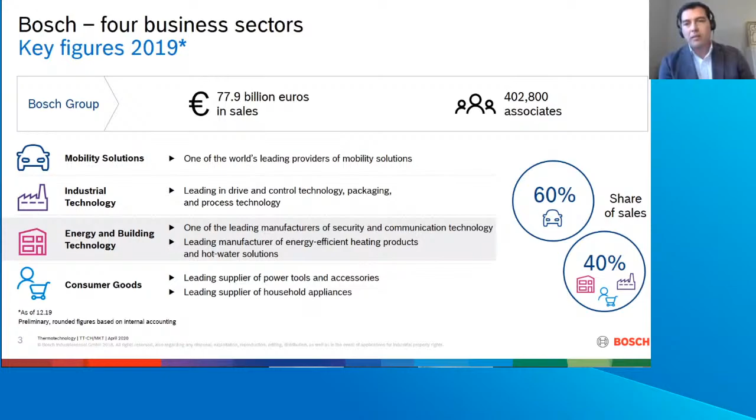El porcentaje de volumen de venta es un 60-40: 60% automotriz y el 40% del resto de las divisiones. En esta slide se muestra cómo está dividido finalmente nuestros.

Un aterrizaje a termotecnología. Nosotros somos un equipo de 14.500 personas que trabajamos en promover y desarrollar ciertos productos para agua caliente, para calefacción, para el sector residencial y para aire acondicionado en los sectores comerciales e industriales también.

Hoy día principalmente nos vamos a enfocar en lo que tenga que ver con Commercial and Industrial Heating, que aquí podemos ver destacada en color gris en la segunda parte, donde mostramos nuestra facturación aproximada de cuánto representa esta unidad de negocio para termotecnología.

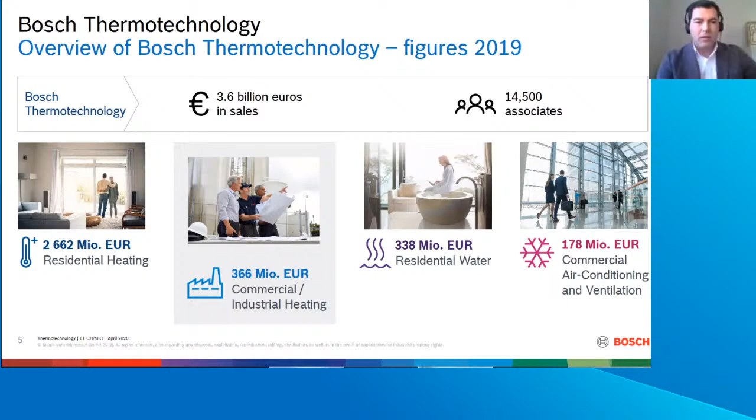Importante destacar que todos nuestros productos hoy día de la línea comercial e industrial principalmente se fabrican en Europa. Está destacado por cada producto, dónde está ubicada cada producción. Sin embargo, hoy día la concentración de los productos que vamos a compartir hoy en el segmento industrial son de 2 plantas: Gunzenhausen y Bischofshofen, de donde vienen todas nuestras calderas industriales hacia el mercado chileno y también hacia todo el mercado de Latinoamérica.

Quise mostrar nuestros sistemas y soluciones. Hoy día nos vamos a concentrar en Process Heat, en Heating, y también para que ustedes tengan una información acerca de lo que manejamos en el sector comercial e industrial.

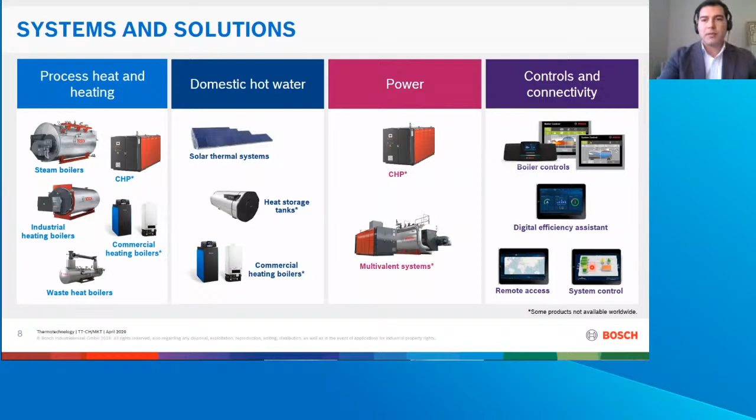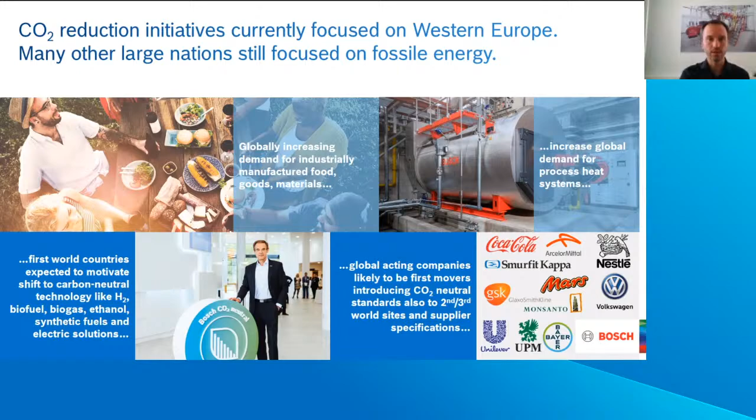Therefore, what we are also seeing, we're getting a lot of requests from our so-called key account customers, be it Mars, Unilever, Nestle, and others, who say we also want to be CO2 neutral. And even one step further, we also want our suppliers to be CO2 neutral. And this is because our customers demand it. If they have the choice and they can buy something with a good consciousness because it hasn't polluted nature, some customers are willing to spend a little bit more money on that. And therefore, I think this will be a very crucial topic to not just big companies, but also their suppliers.

What are we witnessing? At the moment, global population is still increasing, and over the next decades, it is estimated to still further grow. And also, the wealth level is continuing to grow in many regions, meaning people want to consume goods. They want higher levels of mobility. They need more transportation of goods and also more production of goods to consume, be it produced foods, but also things in your daily life.

And whenever you produce something, you will produce at the moment with current technologies CO2, and thus have an effect on global warming. And what we will also see is in many regions that they will not just demand more energy, but also some regions, they will demand more coal, more oil, and more gas. Everybody thinks we are going completely to renewables. That is the case in Europe and some other countries, and also with some corporations in, let's say, their African locations, because they transfer their mindset to other countries.

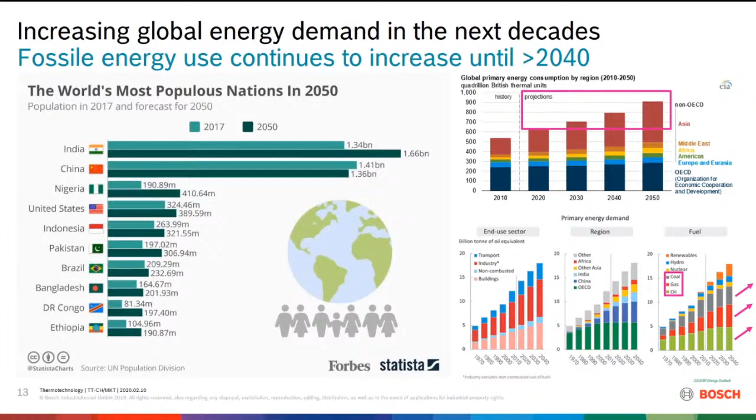But we see other regions like China, India, where CO2 emissions in the next decades will massively increase. They have some little highlight projects that they will communicate largely about. But if you look at these statistics, then we are not solving the problem globally at the moment. So therefore, our mantra is, you see here our CEO of Bosch, Mr. Denner, who says, words is not enough. We have to do something. Therefore, we are going this path.

Even now in the global virus crisis, of course, we are also affected, especially the automotive divisions of Bosch. But still, we are cutting costs a lot, but we are not cutting costs on the global environment topics. And if you look at it, we are producing ourselves. We also are operating lots of process heat systems and boilers.

Where does CO2 come from? It comes from burning gas, oil, fuels, so direct combustion, and also from indirect combustion. Because even in Germany, not all the electric power we get is from renewable sources. We still have a lot of coal and gas-fired electricity plants in Germany, but luckily we are on the path of changing this.

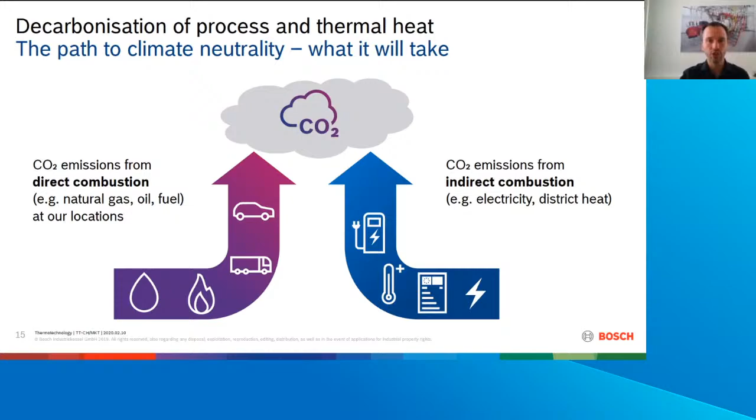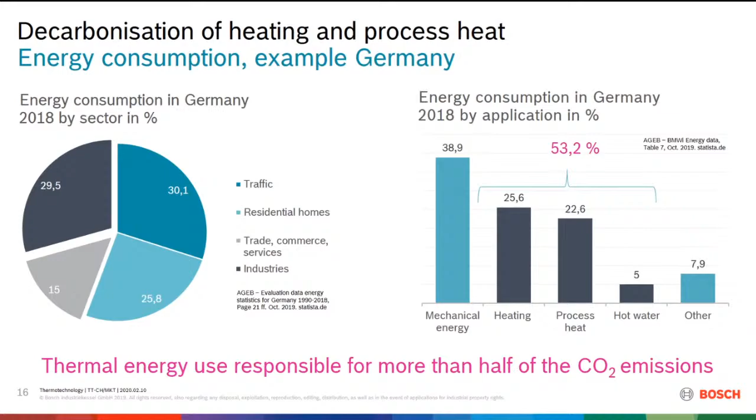Then, of course, before we go into the depths of the topic of hydrogen, why is this topic important for producing companies? This is because if you look, I have here the figures for Germany, but it is similar in many countries. More than 44% of consumption of energy is generated by the commercial and industrial segment, meaning nearly half of the CO2 emissions. That means we have a huge lever because it is just a few companies. If you look at the individual transportation, that's millions of people, billions even. And therefore, we have a large lever to act there and have a quicker progress.

And if you look at where this energy goes, then you will see that much of it goes to applications like heating, hot water, process heat. I imagine everybody of you has eaten something today that was produced with process heat already. Probably you're sitting on a chair with materials that needed process heat. You're going to work probably by car, your tires, everything needs some process heat during production. Therefore, more than 50% of the energy consumption of the companies goes into thermal applications, and those create lots of CO2.

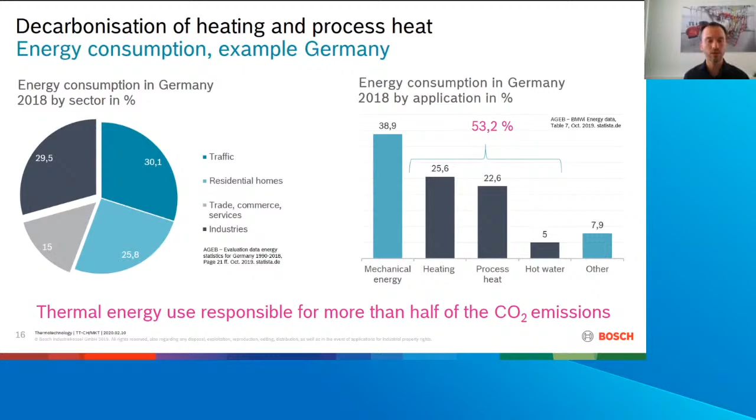Where does it come from, especially today? That's mainly fossil fuels, to be honest. And therefore, we have to differentiate a little bit technology-wise. If we look at the further slides, what are the technical options? Because that depends mainly on the temperatures we use. If we have low temperature applications, for our business, low temperature is up to 110 degrees. It's already quite warm, boiling water temperature. There mostly today natural gas or oil is used, but there are already technologies available today, like heat pumps, power to heat, electric boilers that can be used to achieve these temperatures.

But when it comes to higher temperature processes, then it's a little bit more tricky. There we don't have so many technologies available. For example, we could use electrical systems, but electricity in most countries is several times more expensive than gas. Taking Germany here as a production facility, we pay about 16 cents for electricity per kilowatt hour compared to gas 3 cents, meaning it's more than 5 times more expensive. And if you then have a company with €1 million energy bill per year, then of course it's a huge difference if you pay 1 million or if you pay 5 million.

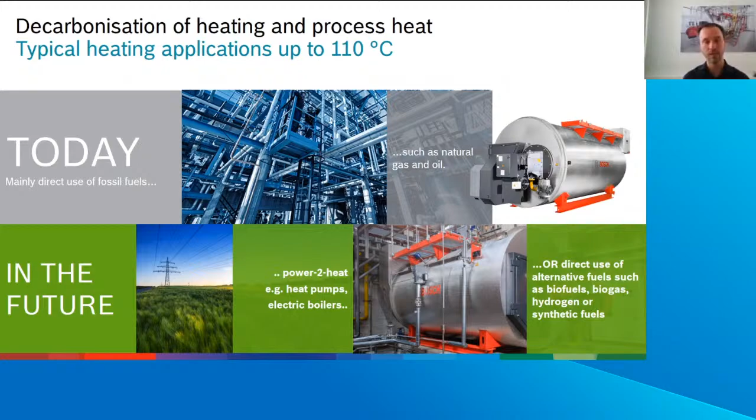As I said, the big challenge is then the high temperature process applications, meaning above 110 degrees, up to 300 degrees and more. And this is also the area, you see it in the background, the industrial boilers. For example, they play a huge role where we go into the pressure directive.

So meaning it's also safety relevant equipment because you have high pressure, high content of water. If I take our biggest boiler, if it's hot and under pressure, it has an energy content that's equivalent to 3.5 tons of Semtex explosives. And therefore, of course, safety is really crucial. That's why we also always have the authorities. And if we are then speaking about new types of fuels, for example, hydrogen, then of course safety has to be maintained at any time.

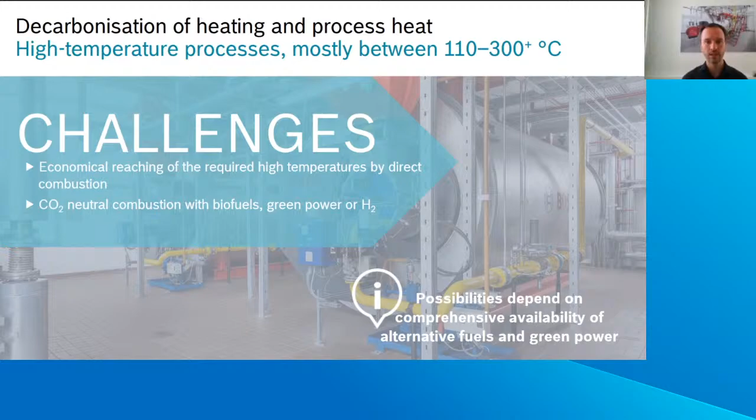So what have we done in the past years? We were thinking about, we have 130,000 boilers at the moment in the field that we have sold. These are all megawatt boilers. So that means we have a huge amount of CO2 creating products in the field all around the globe, also lots in Latin America. We have several dedicated experts working there on these topics.

Therefore, we came up with the idea, what can we do with the existing ones and the new ones as well? Let me put on my laser pointer here so I can show you a little bit more. So step one is CO2 optimization. We are also consulting large companies. We have other entities of Bosch who take care of more production equipment and electricity, but we are really focused on heating and process heat, and say, what can we do with the existing systems?

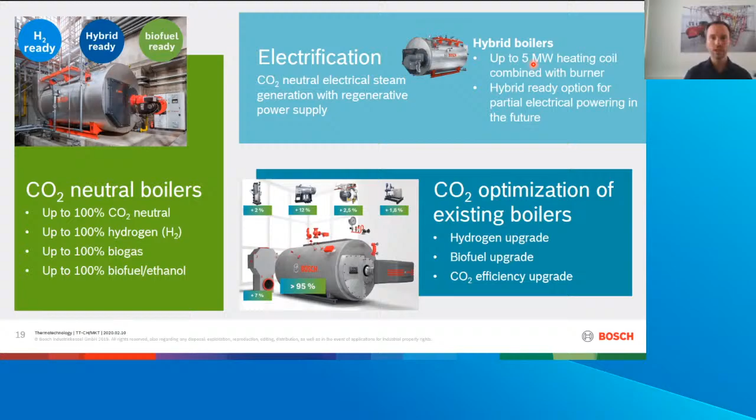And then we said, how can we introduce this? We have some customers who have some electricity available, but not all the time. So we developed hybrid boilers, meaning up to 5 megawatt, we will supply heat by electricity, and we have a burner, and the customer can balance and always use what he has available at the moment.

But now, the topic, of course, today, why you dialed in, is hydrogen. Therefore, I will also focus, and I will go a little bit more into detail here. And we have my colleague from engineering, Mr. Reich, in the line. So after the presentation, we will have lots of time to discuss. You can ask all your questions, and we will be happy to answer them.

So let's start with the basics. Hydrogen has begun to take a vital role in many long-term energy scenarios. To achieve maximum CO2 reduction, of course, it's important to use the so-called green hydrogen. Green hydrogen meaning produced by green power, for example, from solar parks, wind parks, etc.

I think it will be also important to deliver hydrogen from warm countries to colder countries, for example, Germany, and use this in the future because we have established systems, distribution networks that will have to be adapted. But basically, that's what we have been doing with natural gas over the past decades as well.

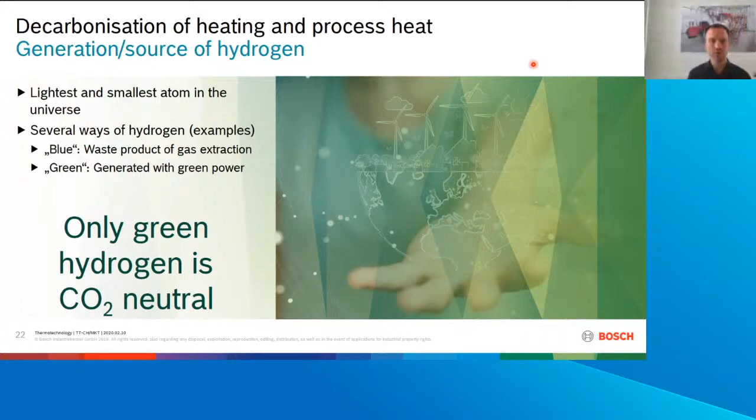As Bosch, we have realized the first hydrogen boiler project I know of, at least in the large power range, and not just research, but actual applications. And what I find the coolest fact about hydrogen is, instead of CO2 out of the chimney, there comes vapor from water, like clouds, and it's absolutely clean. That's really fantastic, if you do it right. We will come to this later.

So where does hydrogen come from? Basically, perhaps most of you know it, we get hydrogen from electrolysis, meaning we are taking electricity, putting water inside, we split it up, we get oxygen and hydrogen. Of course, you have to be careful not to mix them, otherwise it gets explosive. But this is a well-known technology for more than a century. Then, of course, the difficulty is how to deal with it and then burn it.

Another source, available today much more, is chemical processes. So by far, the most hydrogen we are having worldwide today is so-called blue hydrogen coming from processes. And then it's available, and either you use it or you don't. Sometimes it's just waste for some companies.

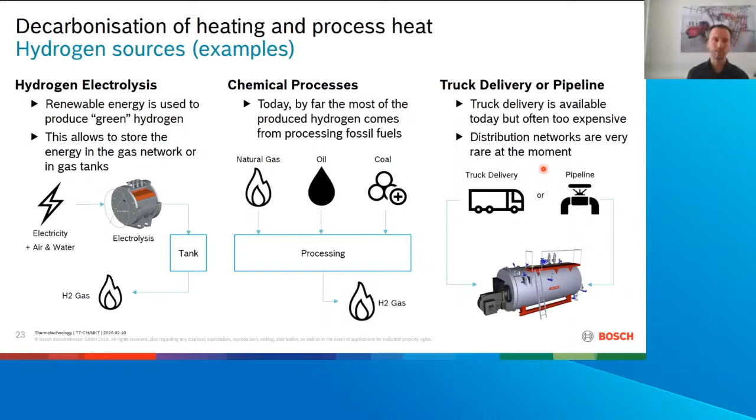And we have, of course, the topic of distribution. So in this case, delivery by truck, ship, pipeline is thinkable, but the distribution of hydrogen is different than from natural gas, because hydrogen, as I said before, is the smallest molecule we have in the world, and therefore it can go through many materials. And if it goes through and you have it in the air mixed with oxygen, then it becomes dangerous. Therefore, you need to adapt systems and special technology.

So burning hydrogen actually sounds quite simple at first. You put hydrogen in a burner, mix it with air, and ignite it. But the experience from our first few projects shows that it's quite tricky if you want to do it in a safe and eco-friendly way. Currently, gas grids that we have around the world are expected, they are still analyzing, to be able to use up to, let's say, 10 to 15% of hydrogen without any adaptations or only minor adaptations.

But we must be aware that the heating value of hydrogen is only 1/3 of that of natural gas, meaning if I put 15% hydrogen in a system compared to natural gas, I will have 95% of energy from natural gas and only 5% from hydrogen, because volume-wise, I have to put in 3 times as much. If I take it by weight, it's different. Then hydrogen has the highest power density. But here in gas grids, we are mainly looking at volumes.

And also, I need much more air. So that is meant here with gas volume. Because if I fire 100% hydrogen, I need 3 times as much combustion air. That means also we need to adapt systems, because normally we put in one part here, one part there. In this case, we have much more throughput.

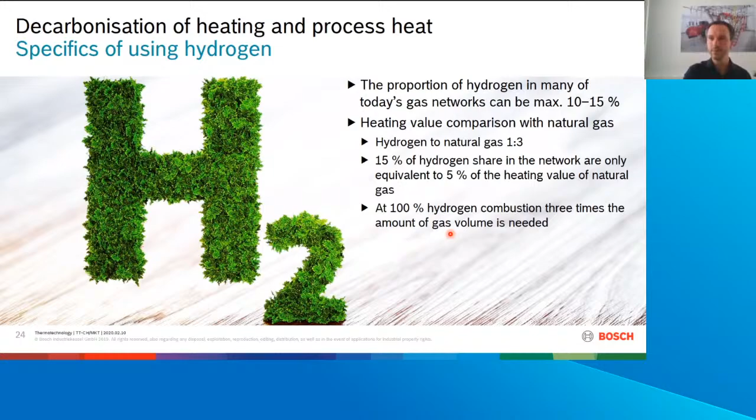Here we see it. Again, as I said, we don't get CO2 from the combustion, but we are getting H2O, pure water, if you want to say it like this. But it's also tricky to burn it. Why is it so? The flame temperature of hydrogen easily reaches more than 2000 degrees Celsius. That's much higher than for natural gas.

Also, it's very important to handle hydrogen carefully. I think most of you have perhaps seen it in school, cool experiments where you take a volume, fill it with some hydrogen, some oxygen, and then you ignite it, and there's a huge explosion. It's sometimes dealt with a little bit too extreme. For example, if you would take a glass, put in a few drips of the normal fuel you're using for your car, put in air, shake it and ignite it, it will also explode. So fuels burn quickly. If it's more quickly, we call it explosion. But lots of fuels do that. It's handleable. You can handle that.

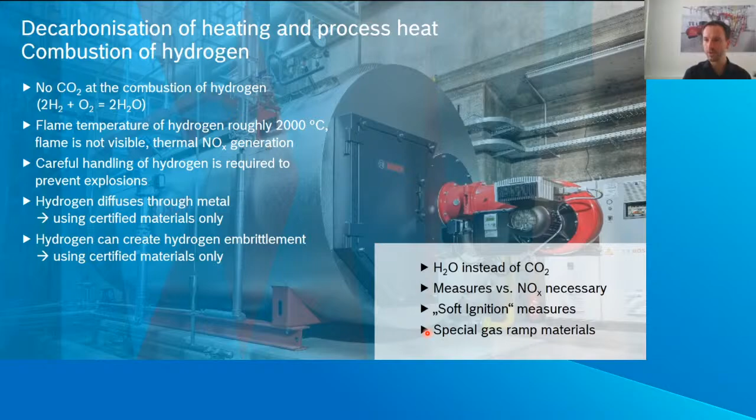Okay, what are we doing then to solve these issues? We have to introduce measures against nitrogen oxide, and we also need to introduce soft ignition measures. As I told you before, if it's a fuel that burns quickly, the quicker it is, the more likely we are used to call it an explosion. So soft ignition means we need to smoothen this process of the ignition in a safe way, and then everything's fine. As soon as the flame is burning, everything runs normal. Also, of course, we need special gas ramp materials, and also the same for the distribution.

What we are talking about with customers worldwide a lot is how and when they will have hydrogen available. So in case you are interested in using hydrogen in the future to reduce or eliminate your CO2 emissions for your process or heating system, we thought of different options we can offer, because not everybody has 100% hydrogen available now. And therefore, we came up with the option to make our product hydrogen ready. And I think other manufacturers of other products are thinking in a similar way. So you buy a boiler today, you're going to use it for the next 30, 40, 50 years. You want to be flexible.

Look at the Netherlands, they are prohibiting new systems that use natural gas. They had some troubles locally with their own gas sourcing. Nevertheless, you can come into a situation where something like that happens. Then you are in a position with a boiler system that cost you several 10,000s or 100,000s of dollars or euros. And then, of course, you want to keep using it. You need it to run your production. So therefore, we said, okay, we need to have modernization options for CO2-friendly fuels. We need to make and certify our products hydrogen ready, meaning you can transfer them to hydrogen later, or you can order them hydrogen firing immediately. But this is, of course, expensive. It's an investment in the future.

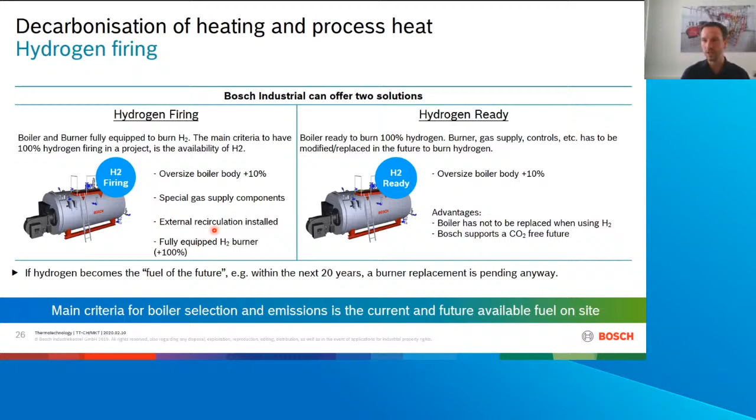The question I get a lot from customers is, can I mix hydrogen in my current system? We are in contact with all burner manufacturers, of course. They also produce some burners especially to our specification, for example here Dreizler with marathon - just one example, we are not exclusive there. We have the case that we can mix up to 2% of hydrogen with existing systems without major adaptations. Minor adaptations, and even up to 5% is possible with some minor changes, meaning we would retrofit the combustion control, mainly oxygen content based - measuring the oxygen content in the flue gas and adapting the fuel-air mixture - and that can compensate for a lot. Also saves you some fuel.

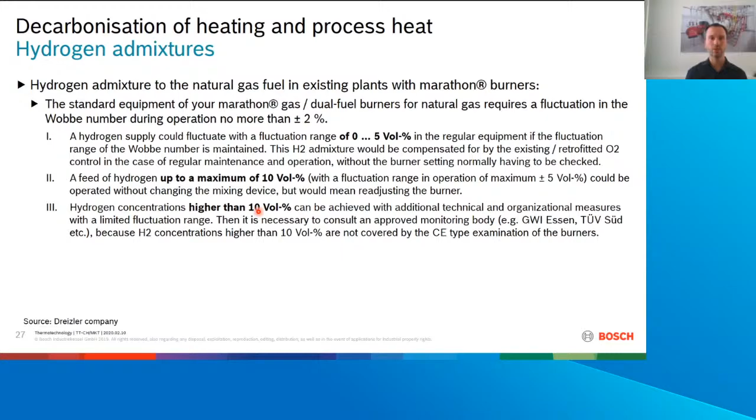What if we want to add up to 10%? Then we have to do a little bit more. We would have to readjust the burner, put a service technician there. He has to look at the extreme points of operation, meaning the maximum amount and minimum amount of hydrogen, and then we can adapt it. When it becomes tricky is if we take more than 10%. Then we need major adaptations because of the topics I told you before, and also we need a new certification, because, I told you, it's safety relevant equipment. And also the notified bodies will ask us to do so.

I got for you some exclusive pictures, we have not published them anywhere else yet, of an example of a hydrogen burner. This is a multi-fuel burner, of course, a nice Bosch boiler, and it uses oil as well as also natural gas, here in yellow, and also hydrogen as fuel. And here we are mixing it. In this case, the customer needs to be flexible - he has discontinuous amounts of hydrogen, meaning he has to adapt the amount.

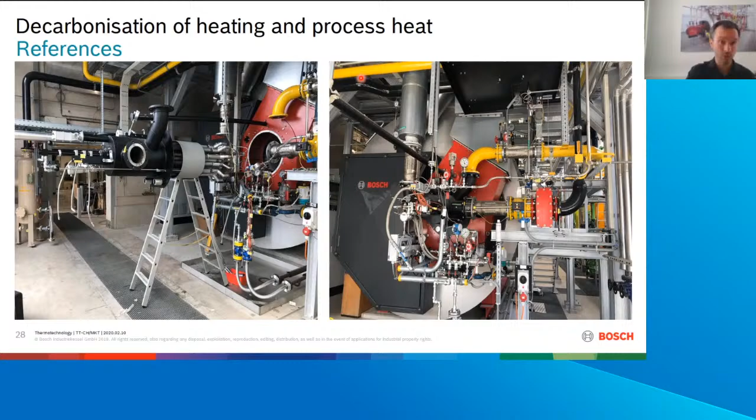He has the external recirculation here because he needs very low NOx emissions, nitrogen oxide, and therefore he has to put some exhaust gas in the burner to cool the flame and make the nitrogen less reactive with the oxygen. And if you look here, we pull the burner out of the boiler to give you a very detailed view inside. And here you can see it's a very complicated technology, and we also have to have several different burner heads at the same time working independently. And then we need the control technology to align them again so we achieve the values we want.

Here's another picture, a little bit more in detail. This is one burner manufacturer that we work with on hydrogen. We are working with 3 manufacturers mainly, meaning Dreizler, Elco, and Saacke, depending on the application. And then we engineer together with them the system and attune it so that the set specification parameters in total are working.

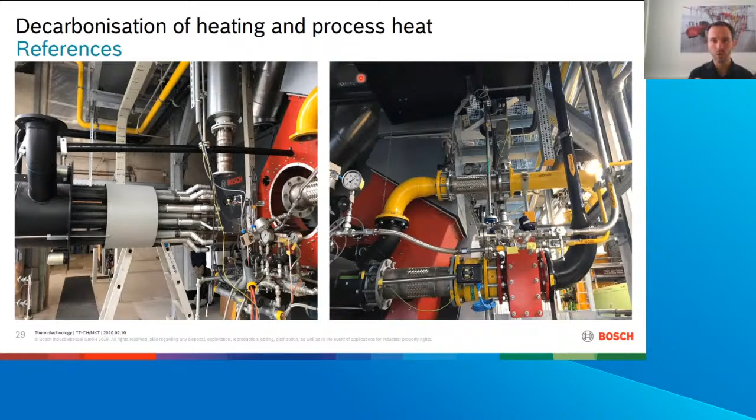I also have some breaking news for you. Just yesterday I got confirmation on a nice project we have in Germany in the community of Wunsiedel, not very well known, in Bavaria. It's very sunny here, as you probably can see out of my window. And there they installed a power-to-heat, power-to-gas installation together with the company Siemens that produces up to 10 megawatts of hydrogen. It's green hydrogen from solar electricity. And yesterday we got confirmation that we will be lucky and will deliver a 5 megawatt heating boiler that can accept up to 100% hydrogen. So they will have a green district heating for their community.

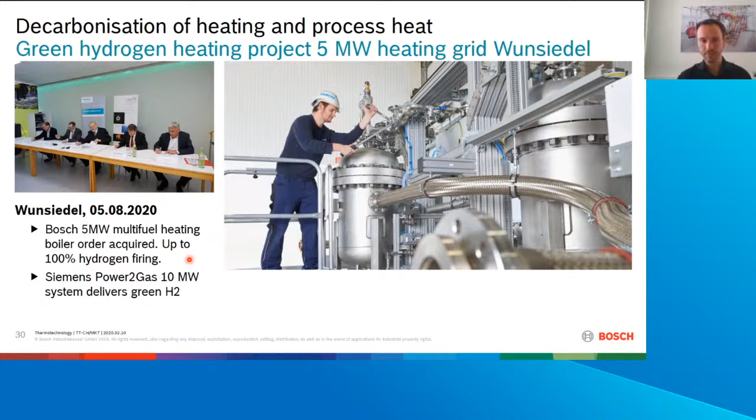Sorry, I had to drink a sip.

I would like, before we go into the discussion, to show you some information on biofuels and electric alternatives, because hydrogen availability will be a topic to be solved within the next decade or two decades, and we need some alternatives already now, or a mixture. I will keep it short, but I think it's an important topic.

So biofuels, what do we mean with this? I mainly mean liquid or gas type biofuels. Biomass, it always depends a lot on where you get your biomass from. If you take trees and cut them down, that's CO2 that's long-term bound, and you put it back into the air, meaning you have a negative CO2 effect.

If you have biomass, which is like waste that would be digested by bacteria very quickly, then this would put again CO2 or methane in the atmosphere. So in this case, it's CO2 neutral in the mid-range if you burn it or if you leave it to the bacteria to digest it. So it's a little bit more complicated.

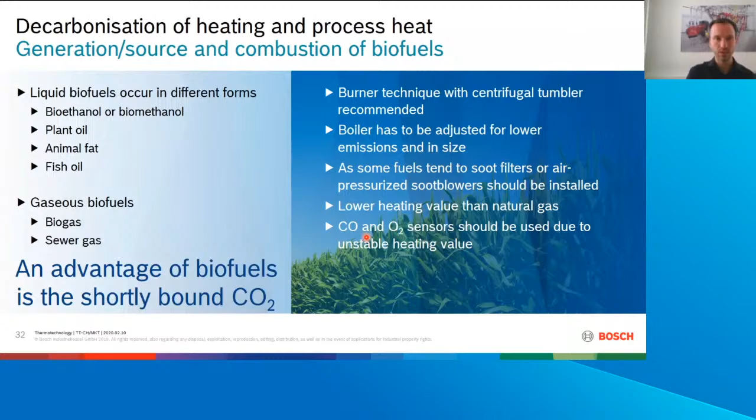I'm almost through, just showing you how such a system could look like, because we design every boiler depending on the application. I don't know of any boiler that has been produced twice here. In this case, it's in Denmark for the company Vattenfall, a huge energy company that produces electricity and district heat. And there they have a plant oil system.

The topic is that it's clogging up the system because of the combustion that's natural with this fuel. They have to clean it, up to 3 times per day, because they want to get the heat transfer surfaces clean again, since only if they are clean do they work efficiently. Otherwise, they use lots of fuel and have a high exhaust gas temperature. In this case, they use a rotary atomizer, a rotating cup burner.

And here you see all these lines in the front of the boiler. There they have pressurized air and fully automatic cleaning, because you can't open the boiler, clean it 3 times a day, let it get cold, heat it up again, and so on. That creates inefficiencies. And here the efficiency is not as good as with natural gas, but still 93% is huge.

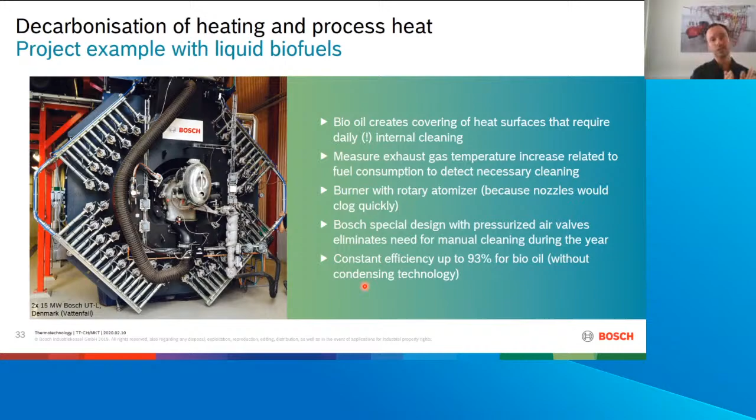If you compare it in the US, many boilers are running at like 84%, and they're proud of it, but it's always a question of how expensive your fuel is. So this is a very good value, considering also it's without condensing technology, meaning exhaust gas temperatures roughly at 130 to 150 degrees. With condensing technologies, we achieve lowest temperatures coming from 1700 degrees of combustion down to, let's say, 57 to 59 degrees Celsius exhaust gas temperatures. So we are really using all the energy.

Before I finish, let me show you a quick glance at electrical systems, because green power can also be used directly without transferring it to hydrogen, if I have it locally. Here we can implement electric coils inside the boiler, in this case up to 5 megawatts so far, probably later some bigger ones. And if it's green electricity, then of course this will be CO2 neutral.

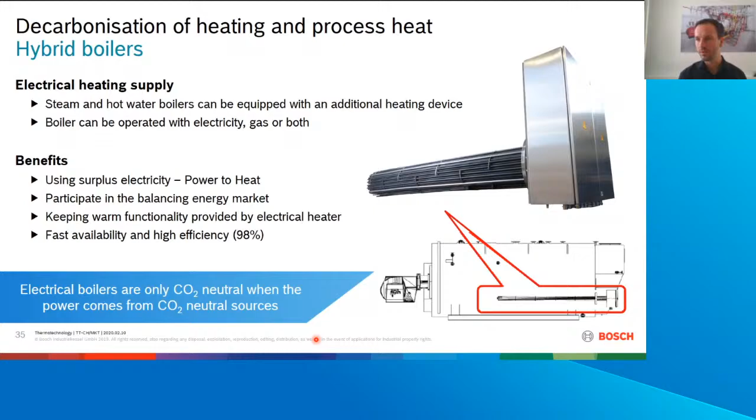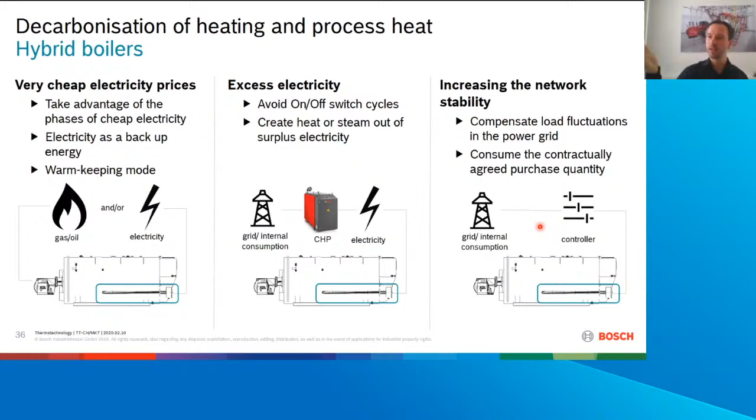When do people do this? One reason is they have very cheap electricity prices. They use it also for warm keeping, to not switch the burner on and off all the time. When they have excess electricity, because they have local electricity production and don't get a lot of money when they put it back in the grid. And also for network stability, sometimes they get benefits from their power company if they consume in a continuous way. Such a heating element can be an important factor to realize this, because the boiler is very flexible on which fuel it is using.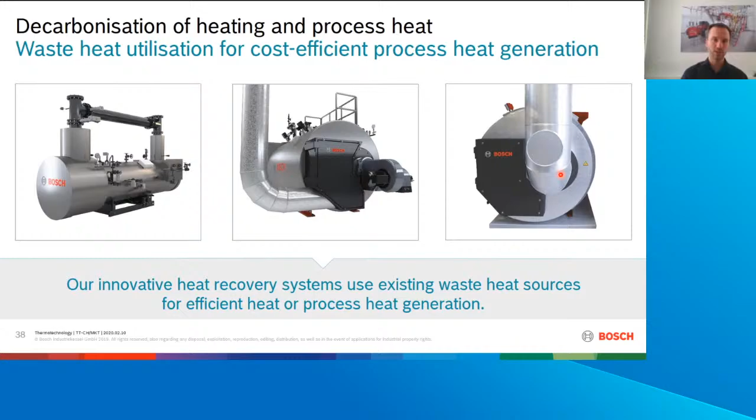Last but not least, if you are producing electricity locally, either a combustion engine or a turbine, you have exhaust gas from them. This is very hot, and you can still use this energy. It's possible to use, for example, a full waste heat recovery boiler for exhaust gas, or just use it partially, introducing it in the 4th pass of this 3-pass boiler plus the 4th pass, or also using it instead of a burner. This is kind of CO2 neutral because the exhaust gas was already generated, you don't create additional CO2, and you can save lots of energy with it.

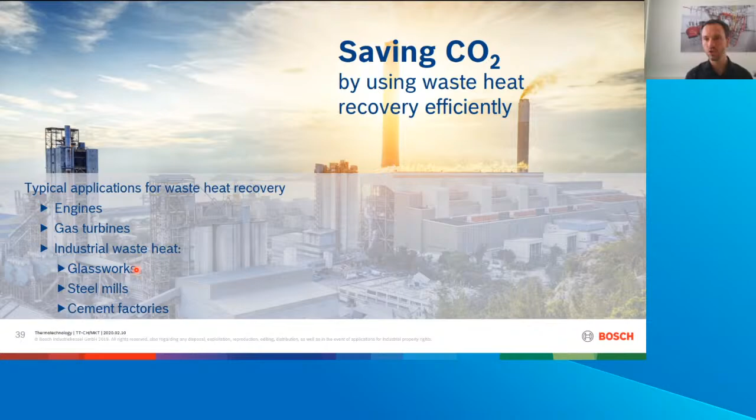Our typical applications are behind engines, behind gas turbines, also in glass work, so production of glass, steel mills, steel production, and cement factories.

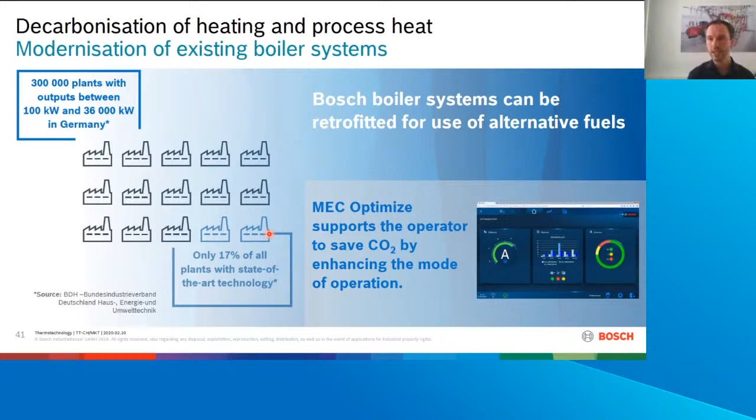Finally, but I will keep this very short, optimization of existing boilers. If you look even in a high-tech country as Germany, 83% of all boilers are inefficient because they are very old, average age between 20 and 30 years. There's lots of opportunities how to save energy there, be it on heat recovery, switching the fuel, also of course to hydrogen, by better controls, better optimization of the burner, saving electricity, water treatment, using condensate, and several other options. But that shouldn't be the topic here today.

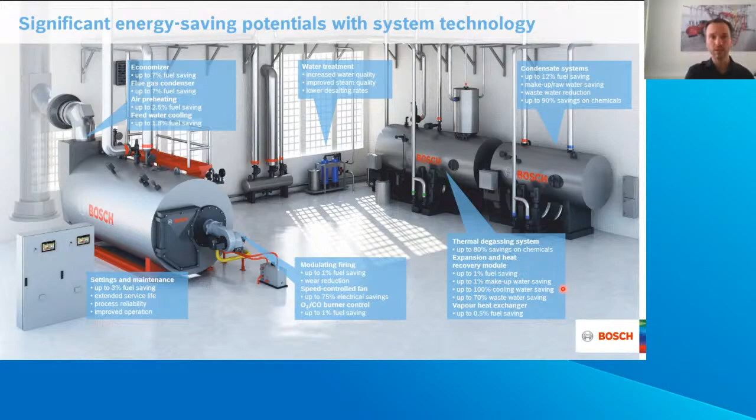The coolest thing about this is it's quite cheap, it's known technology, and the return on invest on these topics is usually between 1 and 2 years, so much quicker than a complete renewal of a huge system.

Last but not least, a curiosity. What I came across within the past years is that you burn a fuel, it comes out of the boiler as CO2, and then you reuse it in the processing. I won't tell any names, but for example, I know a very well-known beverage manufacturer that is available in all of your countries, where the carbon dioxide, the nice sparkle, comes from cleaned boiler exhaust gas. It is cleaned, it's completely pure. That's the nice thing compared to other options to produce it. They put it back in the bottle, so they don't need an additional CO2 source, because they said, we already have a CO2 source, you just need to make it consumable.

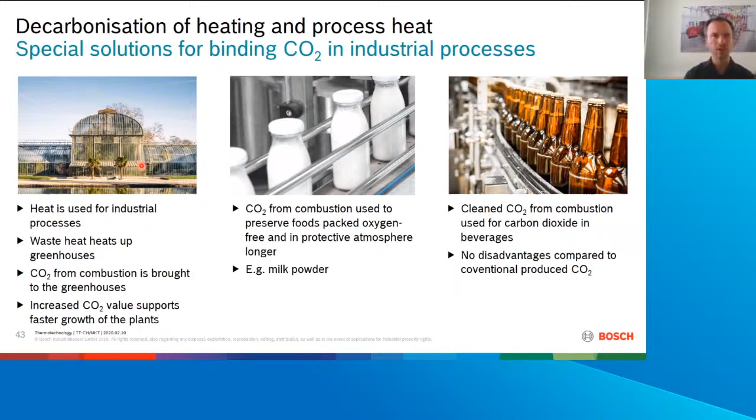Also, for example, instead of the gas, when you have milk powder, you have instead of air another gas inside, so it doesn't go into oxidation, then this is an option. And in colder countries, when you grow stuff in a greenhouse, they saw if they put additional CO2 in the air, the plants grow quicker with larger fruit, and therefore they introduced clean boiler gas into the greenhouses. They do this a lot in the Netherlands and also in Russia.

So summing it up, finally, before we go into the discussion, already now a 20 to 30% increase of efficiency in many existing systems is possible. So I always encourage customers to look at that, even if it's not our main business, but just for the sake of environment. You can also prepare the systems there for different alternative fuels like biofuels, etc.

Some fuel companies will have hydrogen available, and if they have, then of course it's an option to burn it and just get water instead of CO2. Or if you have it from green power, think about introducing electric systems, perhaps also as a combination. During the day, electric operation when the sun is shining, at night use the hydrogen. Then you have a much higher overall efficiency.

So I see hydrogen as a major fuel in the long term for process heat and heating, and also the topic of synthetic fuels generated from hydrogen in order to make it easier to transport, to use, safer to handle.

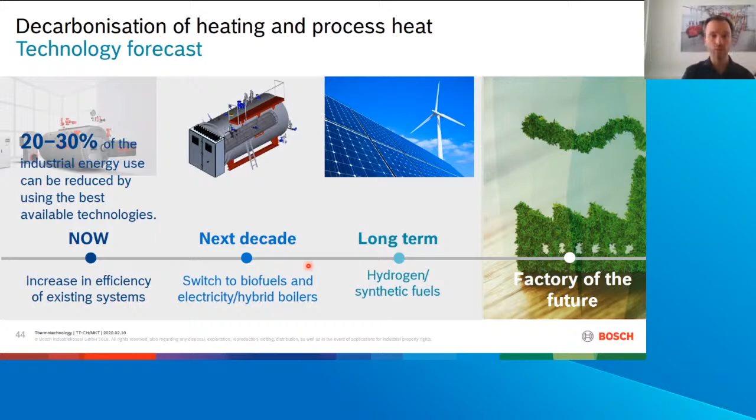In my opinion, my personal opinion, it will be an essential topic for the factory of the future, for the mobility of the future, and even in our personal lives, but this will be in the long term. The biggest effect for nature, CO2-wise, will be if we introduce technologies like these first for commercial and industrial applications, because the number of participants we have to reach in order to have a huge effect is much lower. Technology is available and also much more affordable. And in many countries, they also get subsidies for it because governments have their own CO2 targets and want to help companies realize it.

Therefore, my recommendation: check your existing systems. You will be surprised how much of your CO2 footprint actually comes from process heat and heating. Check for subsidies. Perhaps you get innovative technology for free or subsidized. Check which fuels will be available in the future and make your systems ready for the future already now. Prepare for it. And of course, subsequently, if you have something available, introduce it, because your kids will be thankful

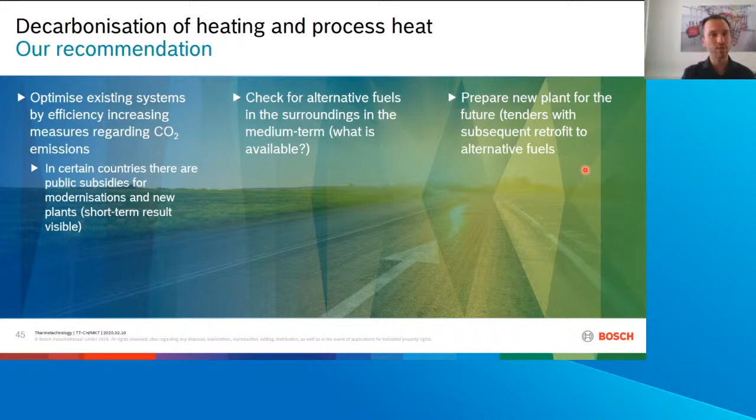for it. I have one on the way at the moment as well myself. And so I'm thinking about what his, to be exact, her future will be. And I want for her to have a clean and safe planet. Yeah, therefore, this is also a really personally important matter to me.

For Chile, we have also prepared a takeaway. And here, the recommendation is not just subsidies, but also look for pilot projects. Look if there are advantages for you, for your customers. Look, for example, for pilots in the mining sector or other examples with industrial boilers. Be part early, because if you are early in, you might be part of a huge industry of the future.

And try to shape the norms. So if there are norms and you can work on them, they may secure your business of the future because they will be market entry barriers for your competitors later. Also, of course, transfer your knowledge, share your knowledge, and try to grasp knowledge from other sources, other countries. Look to Japan. They have been working on the topic of hydrogen for a very long time. They are using it even in the personal sector already.

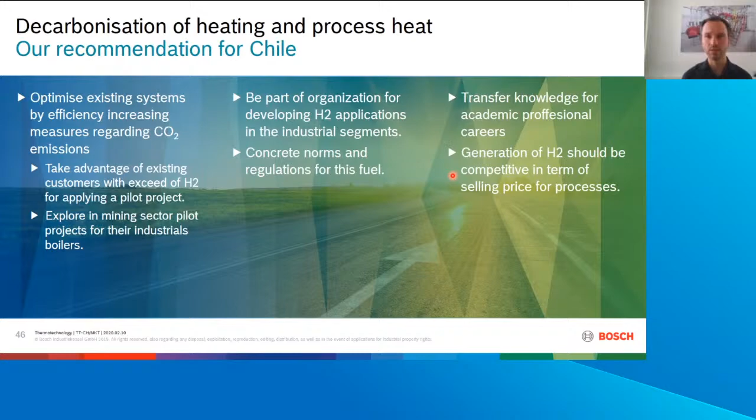And hydrogen is a competitive factor. If Chile or another Latin American country becomes a major supplier of hydrogen on the market, I think this is an important topic for the future compared to, for example, rare earths for mining or something that's somehow limited. Green hydrogen is unlimited. You need water, you need sun, and it's universally applicable. Therefore, in my opinion, technology of the future.

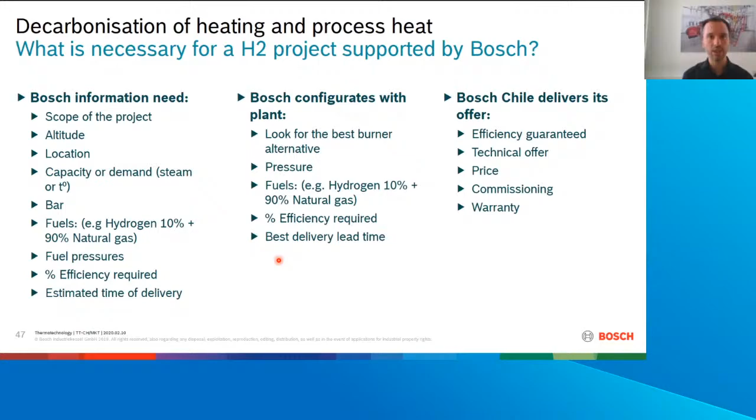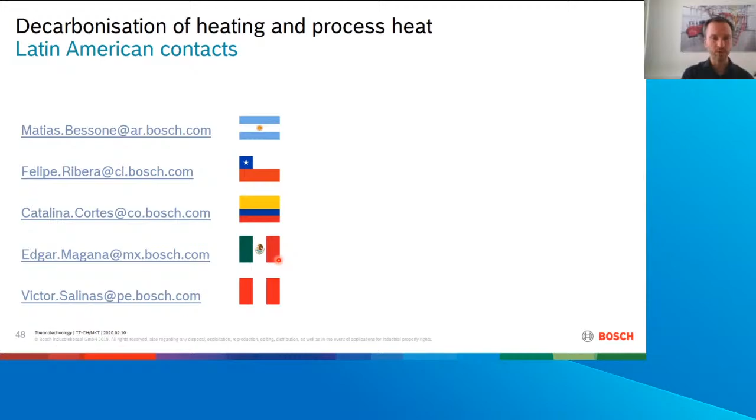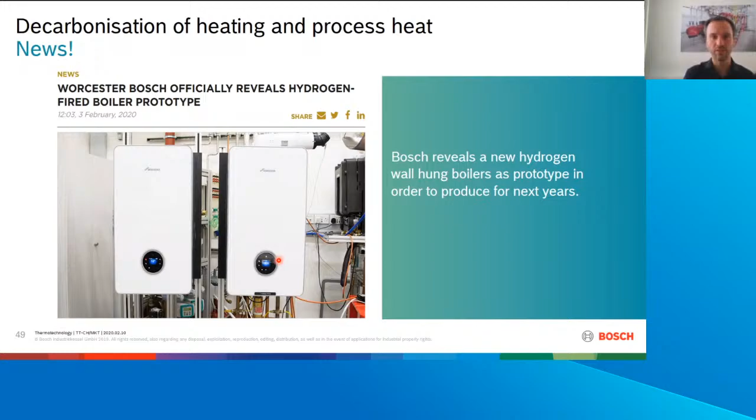Last but not least, just to give you an outlook, we are not just looking at hydrogen in the industrial sector. We are also running field projects. For example, in the UK, we have field examples of small hydrogen boilers, also for the public sector, for personal use, also for hot water systems for homes. So I think in the midterm, hydrogen grids will also be available, especially in pilot projects across Europe. The UK is working very intensively on this. This will be very exciting times.